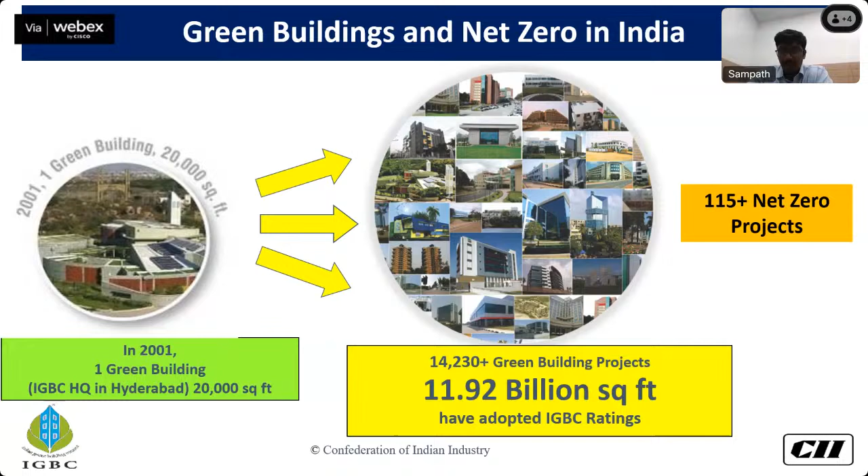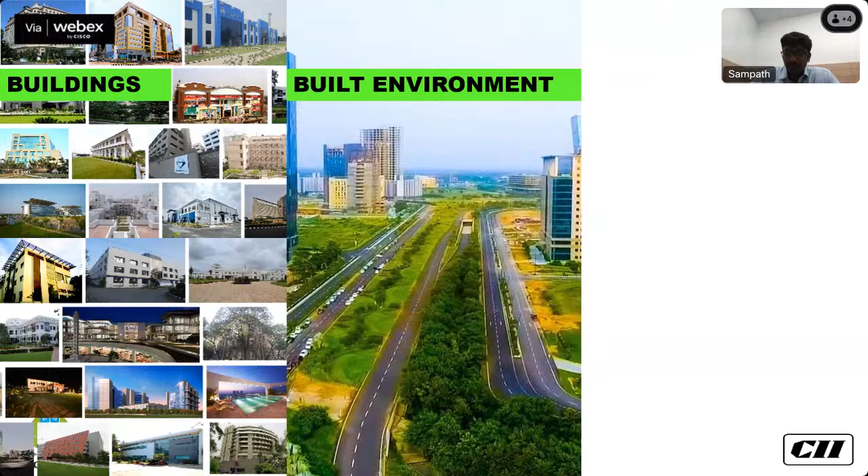We expect many more projects to become net zero in many ways, in terms of energy, water, waste, and carbon. Over the last 2 decades, we have worked on several building typologies, whether in office, residential projects, or airports, convention centers, or factory buildings. Quite a lot of buildings which we have covered, and of course we emphasized on the built environment - townships, large campuses, cities. So with the experience gained from buildings and built environment, we believe that we are well positioned to embark on a journey on net zero.

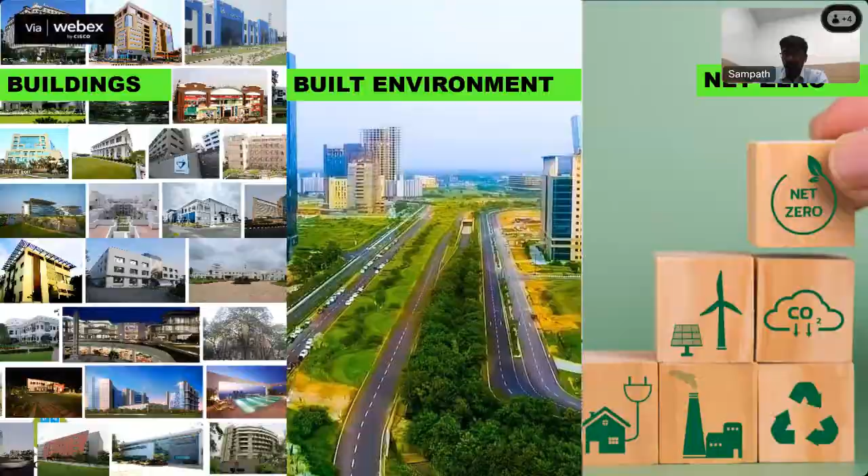Indian Green Building Council is one of the first few councils to start the thought process way back in 2016, when all of us were discussing what is net zero, but how it can be defined. We started our journey, and we launched IGBC's mission on net zero in the year 2021 with a vision to facilitate India to become one of the foremost countries in transforming to net zero by 2050, because we thought we should go on a mission mode. And it's not just the carbon or energy, which quite a few countries or organizations are working on.

We thought it should be a journey in all aspects - energy, water, waste, that is resources, and carbon. Many of the organizations have come forward and committed to achieve the net zero status for the new and existing buildings. And most of our time now, we are spending in terms of facilitating or handholding these projects, how to create their roadmaps to achieve the net zero status.

What is more important is we work with World Green Building Council and many of the councils across the world. Being one of the founding members of World Green Building Council, we are fully aligned with the vision of WGBC, which is whole life carbon vision by 2050, where all the buildings, both existing and new, will be net zero carbon, both in terms of embodied carbon and operational carbon.

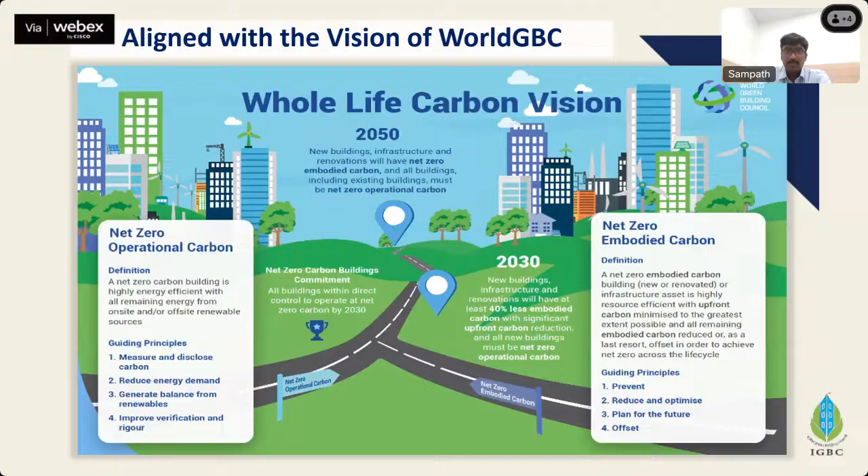Having said this, we have worked on the net zero rating systems exclusively, wherein we are trying to define the criteria for each of these categories - energy, water, waste, and carbon - so that the projects can explore net zero based on the priorities or applicability for the respective projects, and achieve one of these or a combination of these rating systems, and ultimately work towards net zero carbon.

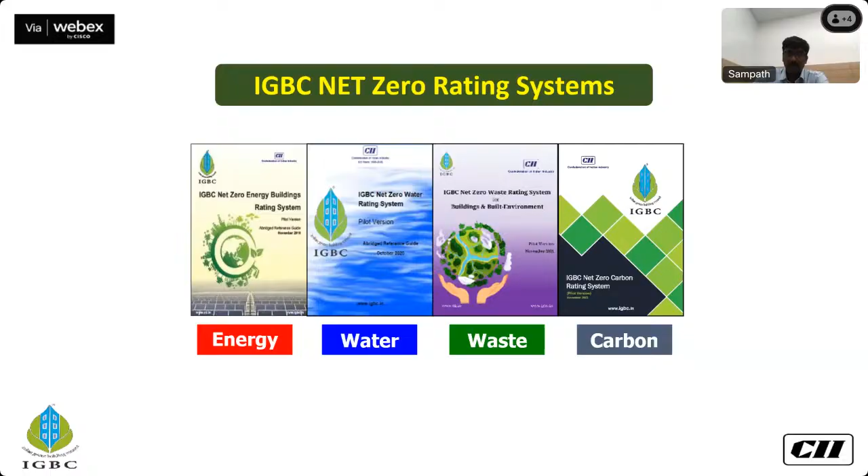What we also believe is there's a nexus between energy, water, and waste, which ultimately results in a net zero carbon status. So we are fully committed to work with the projects and organizations to transit them to net zero and achieve the net zero carbon status ultimately. So having said this, let me dwell a bit more on net zero carbon.

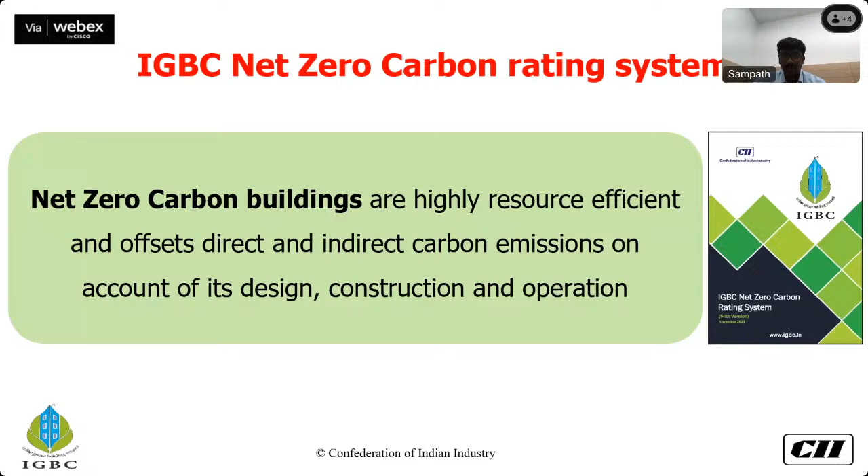So this is the consensus which we have come to with the support of the stakeholders and industry experts. My other panelists, Mr. Selvaraju and Harish Bora, were also on the committee, sharing their views in developing this rating system. I take this opportunity to thank both of them for their valuable inputs before and after the development of this tool.

In terms of approach, we thought we should look at projects both in the design and construction phase and the operation phase, but with a step-by-step approach. So for the design and construction phase, we should emphasize a lot on embodied carbon, and of course a roadmap for operational carbon. Whereas in the operations phase, we look at operational carbon.

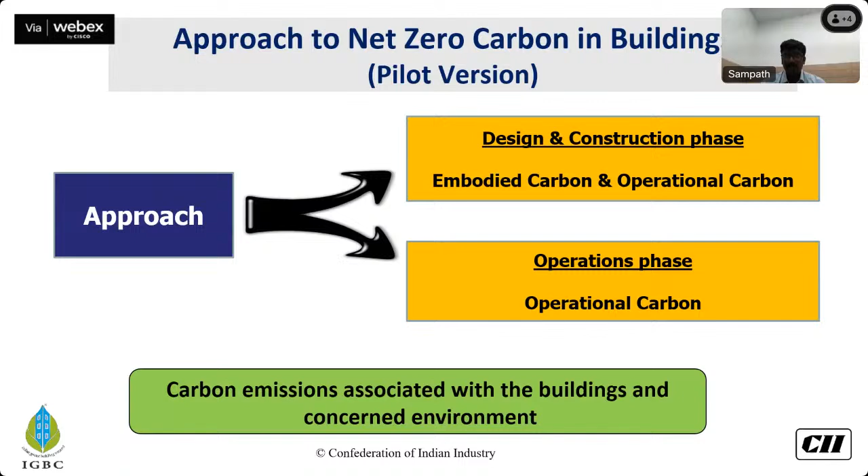Moreover, the net zero carbon is with respect to buildings and the associated carbon emissions with the concerned environment. What we mean is anything related to building operations is what we take into account. So in other words, it is predominantly scope 1 and 2, which we are trying to focus on presently, based on the pilot version approach.

Moving on, we want the projects to look at the whole building life cycle analysis as per the criteria defined in the rating system, wherein we intend the projects to perform whole building life cycle analysis to estimate carbon emissions as per ISO standard 14040 and EN 15978 standard, which is known in the market and which defines the project stages.

So we are looking at both embodied carbon and operational carbon for the design projects. But we are not trying to cover all stages. We thought the market should evolve and understand how to go about embodied carbon with respect to the data sets. So we'll look at embodied carbon in LCA stages A1 to A4, and then operational carbon predominantly with B6, including water which is converted into energy. That's what we're looking at in the pilot version.

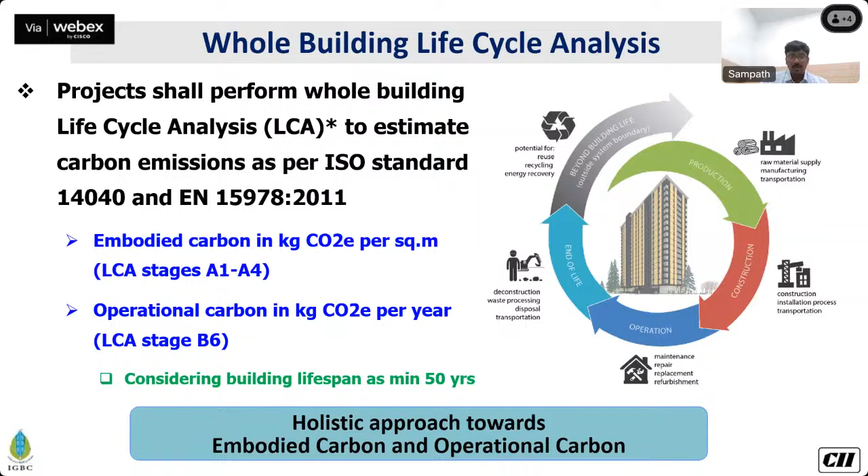More importantly, we thought it's not just about carbon, but as mentioned earlier, there's a nexus between energy, water, and the resources used. So we thought we'll have an integrated approach to net zero carbon. As part of the mandatory criteria, we're emphasizing energy performance ratio, water performance ratio, and how the project is managing waste with respect to organic and dry waste, and whether the project has a green procurement policy so that materials being sourced are sourced sustainably.

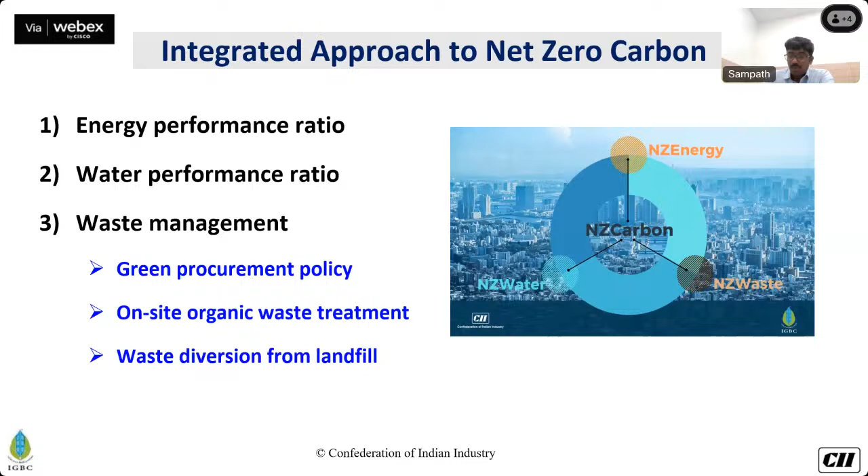Let me delve very quickly into this. As many of you may be aware, the energy performance index ratio is defined in energy codes, whether it is ECBC or ASHRAE 90.1. EPI ratio is nothing but the EPI of a proposed building vis-a-vis a standard building, where we look at a prescriptive approach or a whole building simulation approach. Whether it's prescriptive or whole building, the EPIs defined as per the standard, or as defined by the BEE, will be taken as a standard building, and whatever the proposed case is, is the EPI the building actually has, or the EPI derived from energy simulation.

This EPI ratio should be lower than 1. If it is higher than 1, that means the building is inefficient, and the mandatory requirement is EPI should be 0.95 or lower. Only such projects would be accepted for net zero carbon. The intent here is that projects may offset all the carbon through renewable energy sources, but we are also looking at energy efficiency, energy performance, and energy demand, which should also be taken into consideration.

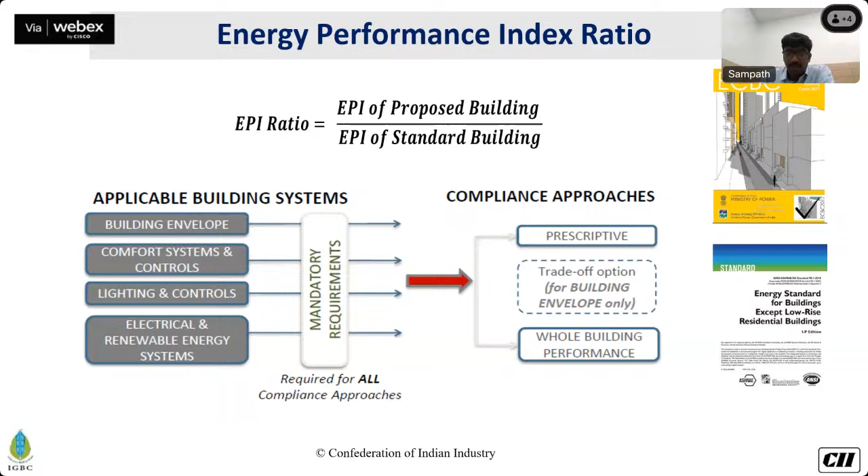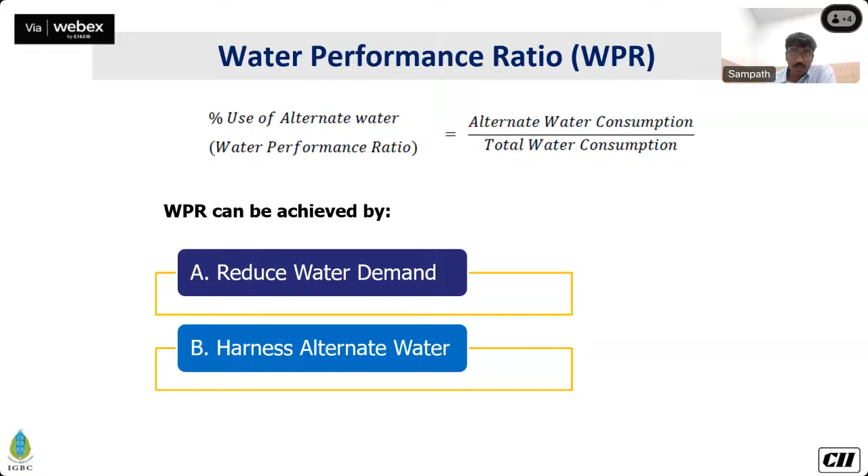Similarly, we are looking at a water performance ratio. The water performance ratio is defined as alternate water consumption toward the total water consumption. Alternate water is any water which is treated wastewater, stored rainwater, condensate water, or even water sourced through tankers or piped connection as grey water. What we are trying to say is the project is recycling water and using as much water as possible within the premises. So we're looking at circularity as a concept here, and how we can achieve it by reducing water demand and harnessing alternate water.

For green procurement in design-based projects, we emphasize mostly construction-related materials. We're encouraging projects to use eco-label products, salvage products, rapidly renewable products, materials with high recycled content, or alternative products like M-sand, and upcycling in terms of the use of construction waste.

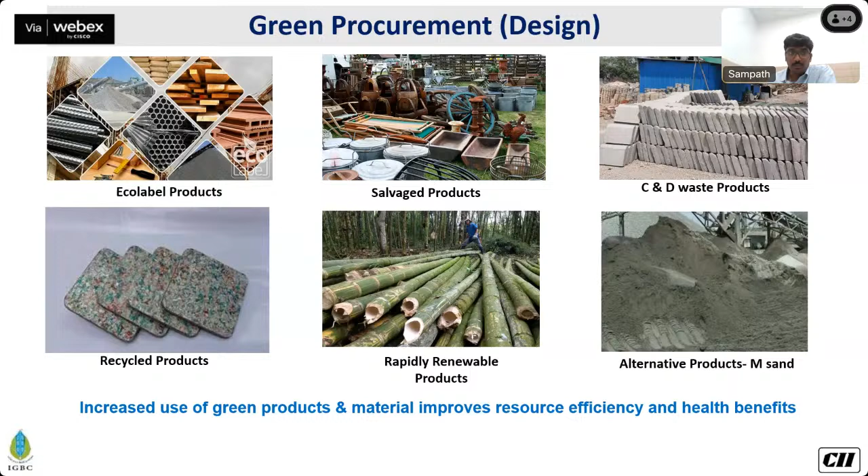Materials made of construction and demolition waste are what we're trying to emphasize through green procurement in design. Whereas in operations, we're looking at biodegradable materials, like trash bins or eco-friendly housekeeping chemicals, use of recycled papers, and banning single-use plastic. So the policies can be looked at from the organization so that the materials sourced for operations are environmentally friendly.

With respect to projects, in terms of the design and construction phase for net zero carbon, as mentioned earlier, we are focusing on embodied carbon. With the consensus and industry practices both globally and in India, we thought we should benchmark, because we can't make embodied carbon zero considering the present context. So we are trying to encourage projects to use low embodied carbon materials.

Here we are looking at civil materials to start with, because these have higher embodied carbon. To name a few: concrete, steel, glass, aluminium. Civil materials and interior materials together account for 80% of the embodied carbon, predominantly from civil materials. We've also set aside MEP products, technologies, or solutions for now. So the emphasis is more on civil materials, as the data set for these materials is more readily available.

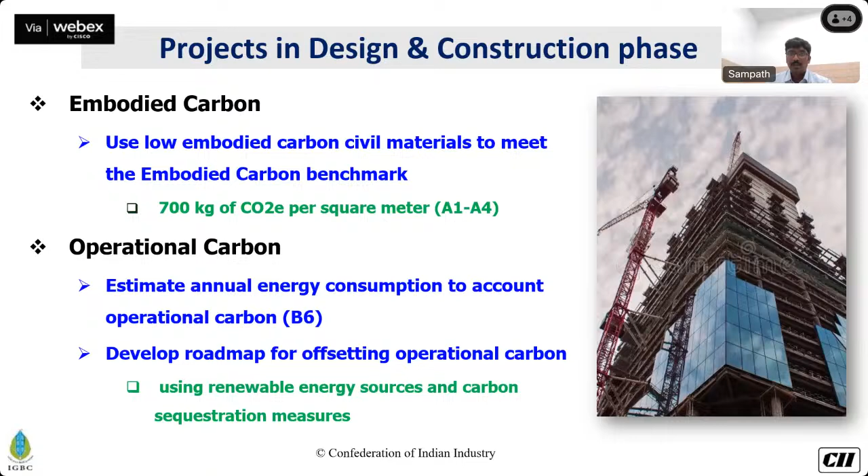For example, a project which uses single glazed glass for the envelope may have lower embodied carbon, but during operations, due to radiation, more heat gain occurs, and cooling loads increase because of the single glaze being an inefficient glass. But if we convert the single glaze glass to double glazed glass, the embodied carbon would certainly be higher, but what could be the relative reduction in operational carbon? So the point we are trying to emphasize is that projects should focus on both embodied carbon and operational carbon while identifying materials and choosing products accordingly.

Some of the strategies to reduce embodied carbon—the first and foremost is how we can optimize the structural design.

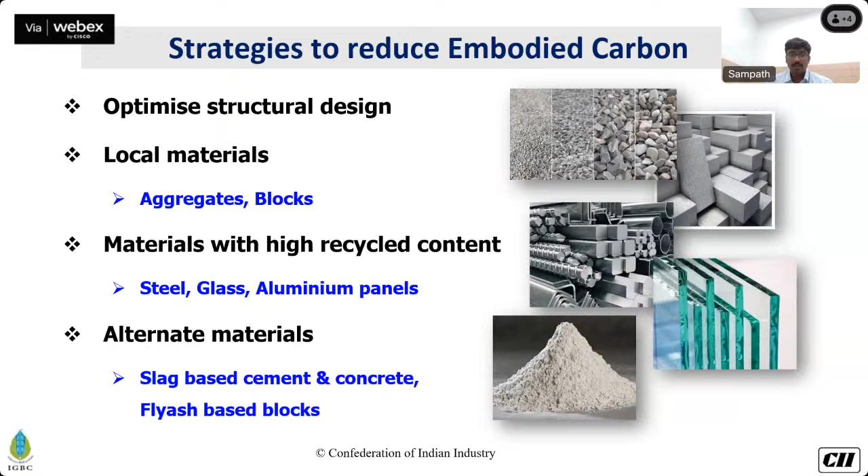This would significantly reduce the use of resources, particularly concrete and steel, which can reduce the overall loads in the building. Sourcing local materials can significantly reduce carbon emissions resulting from transportation. Having sourced high recycled content or recyclable materials also helps reduce embodied carbon. Alternate materials like slag cement or fly ash based blocks can be used to reduce embodied carbon, because we are not using virgin materials which increase the overall embodied carbon.

So we have come up with a checklist. I will not dwell in detail, this was basically to give an overview. We have come up with a checklist wherein projects have to do a whole building life cycle analysis in design and construction phase, emphasis on green procurement, and have strategies to reduce embodied carbon with the integrated approach as we just discussed.

On a scale of 100, the project needs to demonstrate compliance. We have come up with near net zero and net zero recognitions for design, wherein projects have to comply with the benchmark of embodied carbon of 700 kgs or lower per square meter, and then offset at least 75% of annual operational carbon as a roadmap, and comply with a minimum of 40 points. Such project will be recognized as near net zero.

And for net zero carbon, the criteria would change for operational carbon, wherein more than 90% of annual operational carbon should be offset. Of course, we have given a leeway of 10% here, because all said and done, projects can do everything, but still there are certain challenges to offset operational carbon.

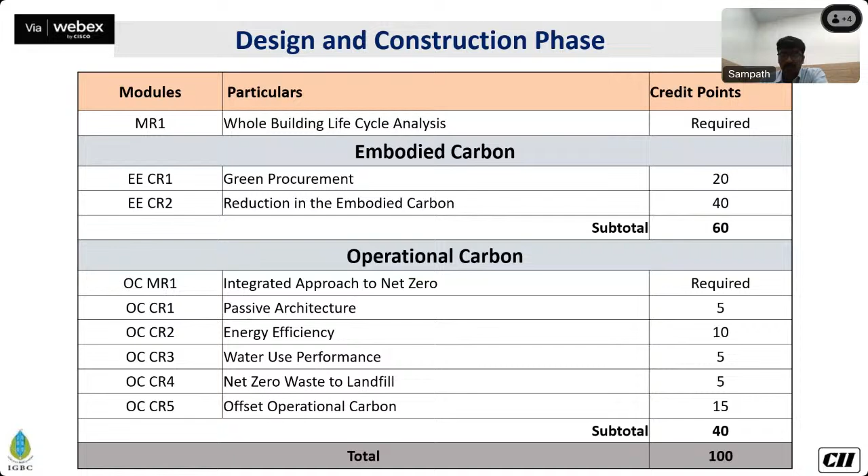Say, for example, by use of DG sets we use diesel, or we use CNG or LPG within the projects, or other sources. Even if you want to source 100% renewable energy, it may not be possible. Of course it truly may not be net zero, but is almost there. Even such projects we are trying to recognize now, and they need to comply with a minimum of 60 points. What we are trying to emphasize is, out of these 60 points, it is very important for projects to emphasize energy, water, and managing resources from materials and waste. Such projects will be recognized under net zero carbon.

Moving on to projects in the operation phase, what we thought is the projects are already in operations. There's a legacy carbon or residual carbon and embodied carbon - that's past. But what we want the projects to focus on is the present and the future. So in that context, we are looking at operational carbon.

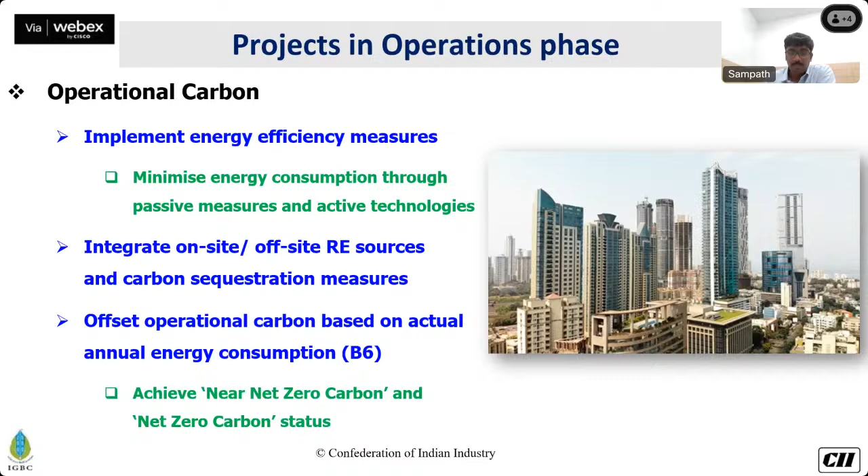So the strategies here would be how the project can implement energy efficiency measures so as to reduce the overall energy demand and energy consumption in the project, and integrate on-site and off-site renewable sources to reduce overall energy consumption, or source clean power, which in turn will reduce or offset the operational carbon, which is B6 as per the LCA stages. Such projects can be recognized under near net zero carbon and net zero carbon.

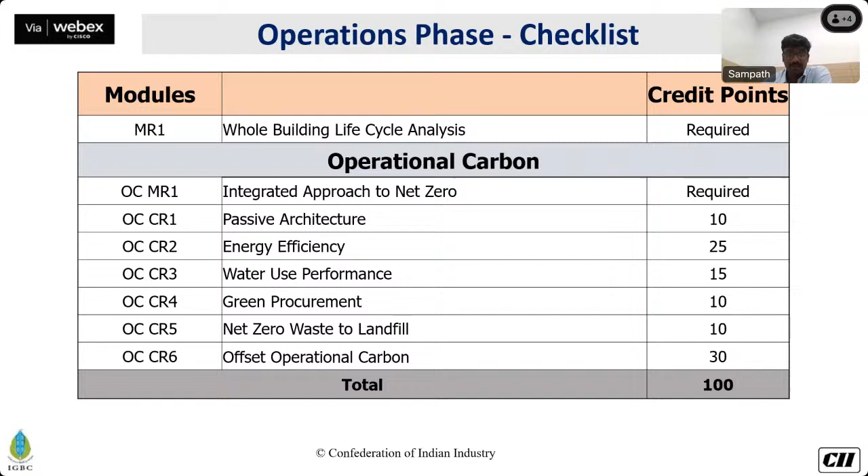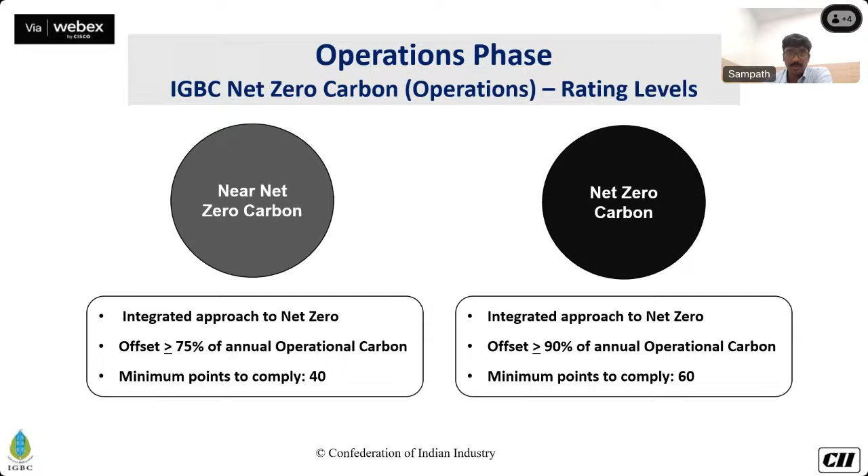So we have a checklist again on a scale of 100, where even in operation phase we're encouraging projects to have passive measures which can significantly reduce operational carbon. Similar to design phase, we have in operations phase near net zero and net zero, wherein the thresholds will remain the same, but we are not addressing embodied carbon. That's the difference in operations phase.

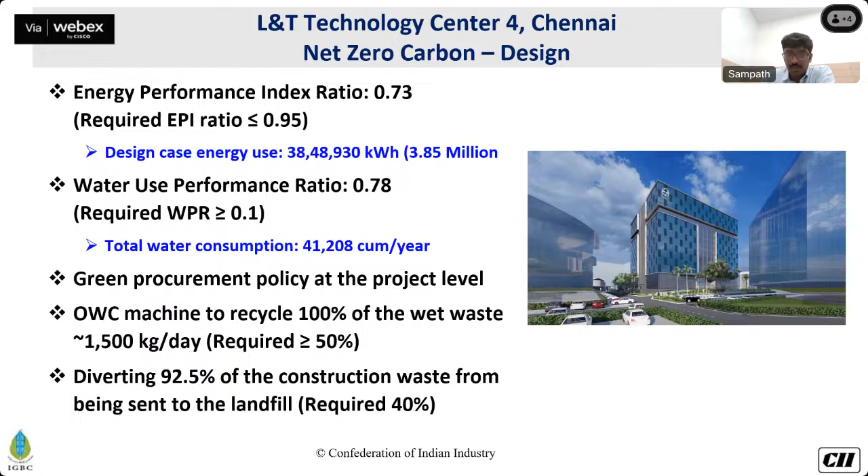So we have a case study here. I just want to inform Mr. Silverus, who will dwell more on this, but we were fortunate to have L&T Technology Center in Chennai come on board as the first pilot project, and very recently we have recognized them under a net zero carbon design phase. Many good measures have been taken by the project to comply with this criteria.

So I just want to share this information, and then I'll take a moment to emphasize that being a pilot, and carbon being a very complex subject, there is a lot more to be done. So we thought we'll take a step-by-step approach. We're not trying to consider carbon in all aspects. There are certain things which were left out, but we are aware of that, and these would be taken into account as we progress, in terms of the availability of materials or market adaptability with respect to adopting these concepts.

So to name a few, in the design and construction phase, we are not looking at interior and finishing materials as well as equipment systems, and also the emissions on account of use of DG sets, electricity or water during construction, or movement of people. More importantly, we are not recognizing carbon credits or RECs. We want the projects to directly reduce embodied carbon and operational carbon.

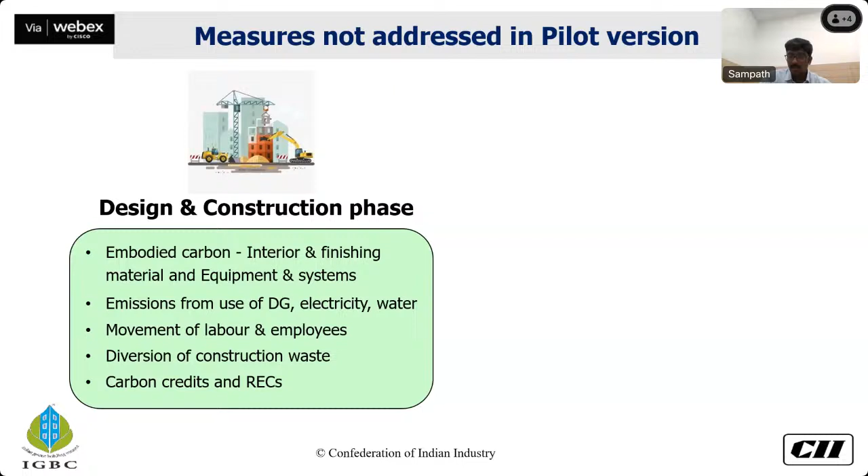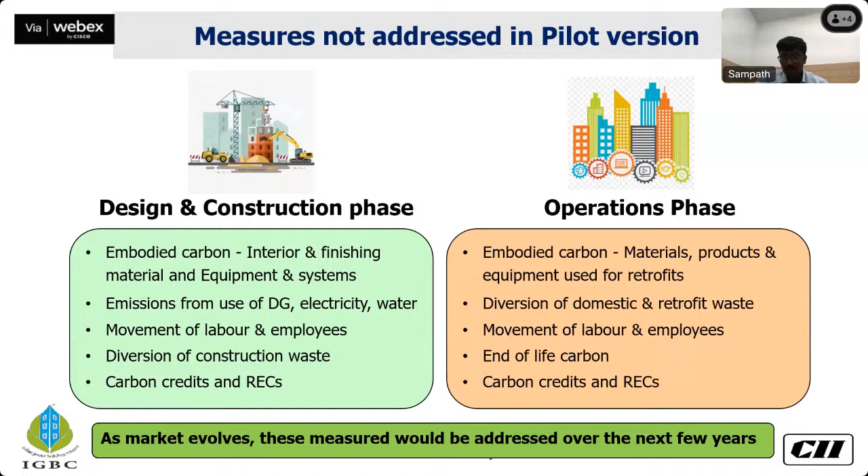The same holds good with operation phase. We have taken certain measures that we will not consider presently, to have a step-by-step approach. But projects which take up these measures would be duly recognized in the innovation category. That's the approach we are looking at.

This is not just for net zero carbon. Over time, as I mentioned earlier, more than 100 projects have taken up pilots in different categories. So what we're telling projects is take a step-by-step approach, whatever is more feasible or applicable. For certain projects, water is more important or practical to implement, so we suggest those projects look at net zero water. For others, energy is more relevant, particularly with respect to local renewable energy policies. Wherever feasible, we encourage projects to adopt energy, water and waste-to-landfill rating systems, and then ultimately look at carbon.

To sum up, ladies and gentlemen, there's an excellent opportunity to demonstrate leadership in net zero. We're looking at leaders who can benchmark the processes. We say green buildings reduce operational cost, but let me share that net zero buildings definitely can reduce operational costs, and going net zero makes business sense, all the more so. More importantly, we are all contributing to India's commitment to become net zero by 2070. With this, I conclude my presentation. Thank you.

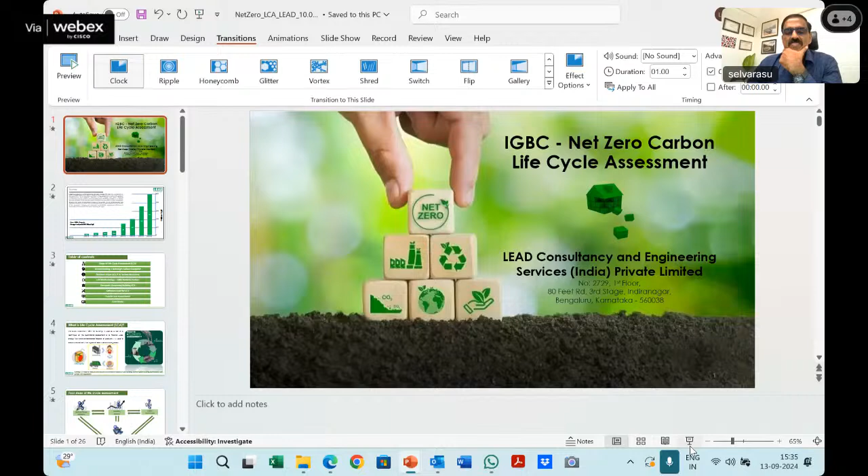I hope my slide is visible. Yes Selva, thank you.

Thank you so much, and thanks to IGBC for inviting me. Some of the slides were already covered by Sambat, so my job is a little simpler. If I exceed my time, please remind me, Sambat. Okay sure, sir. My talk will be predominantly on net zero carbon buildings.

I'll be covering predominantly the L&T case study, which is the first net zero carbon building by design in the country. So just before that, one second.

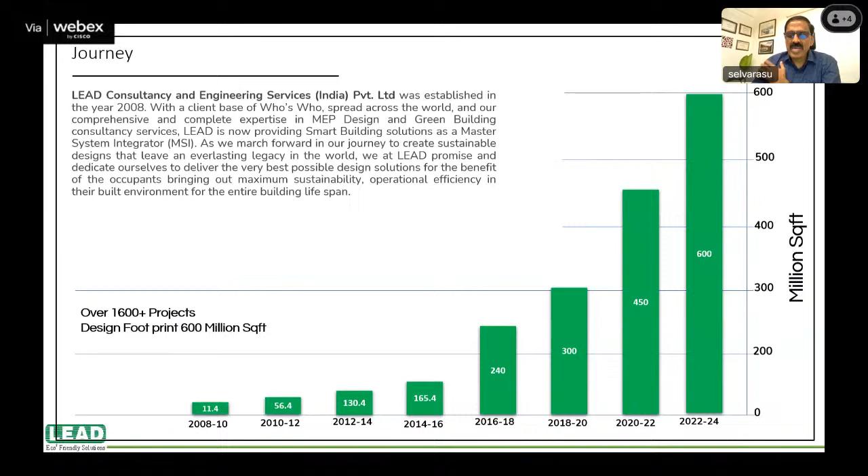I'm from Lead Consultancy. We started 16 years back, and we have done more than 1,600 buildings which are certified in the country and almost 7-8 countries, close to 600 million, that is our footprint in terms of work, with around 180 people working in the organization across various locations. That's a simple introduction about the company.

I'll be talking a little bit about LCA. I think another expert will already be talking about LCA, so I will not go too much into it. A little bit on understanding building carbon footprint, the boundaries, and the scope for LCA analysis. What is the methodology IGBC adopts to perform LCA? That's also something I'll cover briefly since someone already spoke on it. And the standards governing building LCA, software used for LCA, and the case study of L&T. So that's in a nutshell what I'm going to cover in the next 15-20 minutes.

Now, most of you are aware, life cycle assessment is basically understanding the 50 years life cycle of the building.

I make a quantitative analysis to understand the impact the building is going to create on the environment in terms of CO2 reduction, then operational performance, water, energy, waste, all the resources consumed by the building, including embodied energy and carbon, and how we minimize the impact on the environment for the entire life of the building.

We normally classify the building with about 50 years life cycle. It starts from a simple cradle to grave: extraction, manufacturing, use case, then maintaining it for 50 years, and disposal after demolishing the building or part of it. The entire life cycle needs to be analyzed to understand how the building will impact the environment, from extraction, construction, operation and maintenance, to disposal.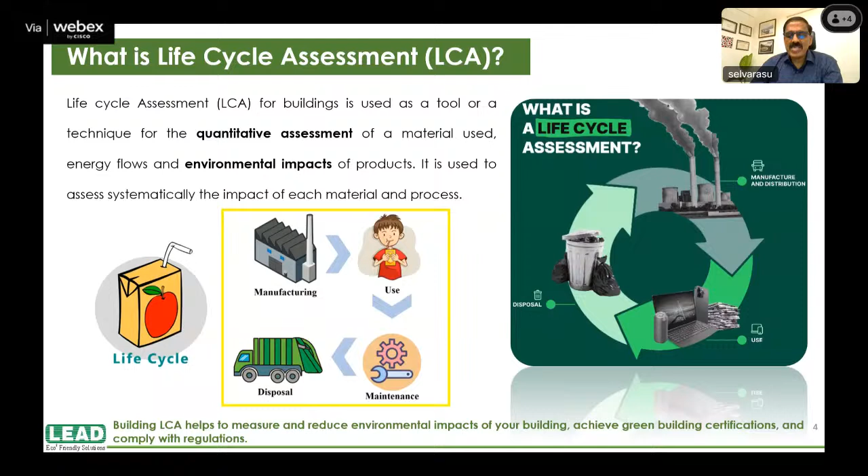When you look at the life cycle assessment, it gets into 4 critical steps. One is goal setting and scope definition. We need to define the goal, what you want to achieve in a building, and the scope needs to be defined very clearly at the beginning. Most of you are aware how scope 3 emission is very tough right now in the country to really perform the task.

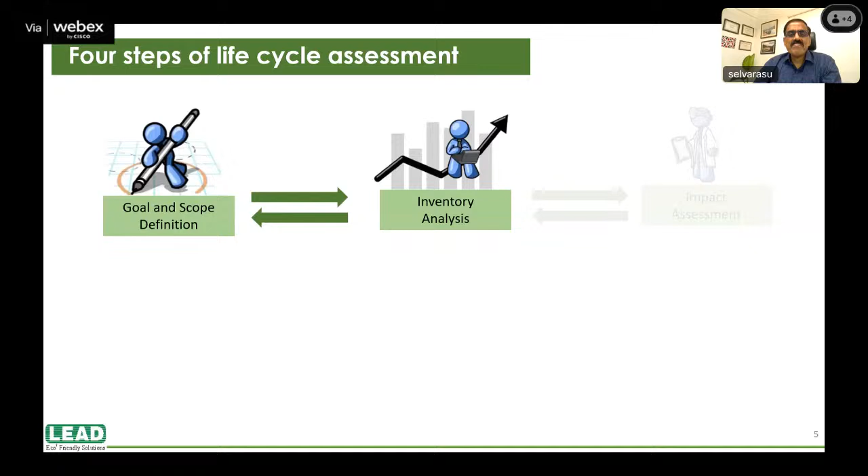So we need to have a very clear scope definition, which IGBC has already performed. Then inventory analysis, where we take stock of all the building material, systems and construction we are going to do in the building. Then impact assessment through LCA. Then we revisit the goal and scope and keep refining the entire process. This goes in multiple cycles to get the best result, minimizing embodied carbon emission or operational carbon emission.

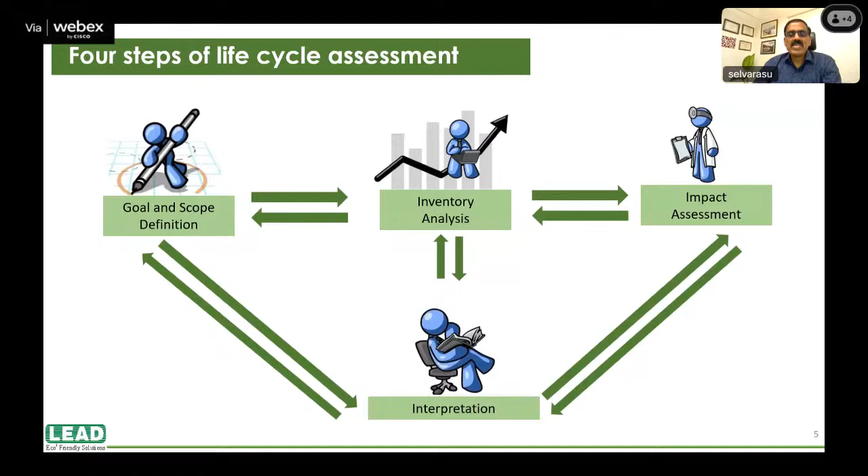When you look at carbon footprint, it starts from manufacturing emission, extracting raw material from different sources, then manufacturing of product for your building construction, then transportation from manufacturing to distribution to the building site. Then there's a lot of emission during construction since we consume water, generate waste, and consume energy. Then operational emission, for 50 years we operate the building.

We also keep renovating it in different periods over the entire 50 year cycle, so there's a huge amount of carbon emission possible in that life cycle. Then end of life, it has to be demolished and disposed of - something can be recycled, something goes to landfill. So it's very critical to plan from the beginning to minimize landfill at end of life or during construction. That kind of material needs to be selected for the building to have minimum impact on the environment.

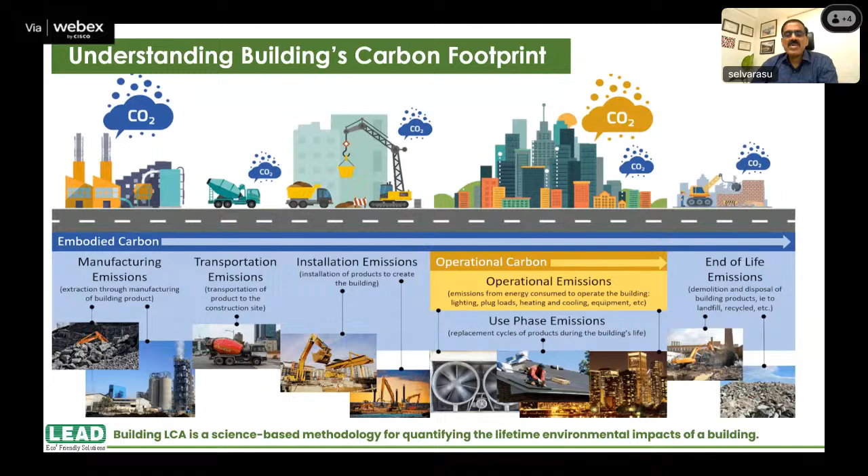This is how the whole cycle goes in terms of cradle to cradle, to understand the carbon footprint. So we need to focus on all elements - it's not just design or embodied carbon or operational carbon, we need to consider the entire cycle. It'll take some time; globally people are trying to get this entire thing stitched together with scientific data done once in the industry.

And various system boundaries, you know very well, this gets classified into A1 to A3, meaning raw material extraction, transportation, manufacturing. That comes in the manufacturing segment, up to the factory gate. Then construction - again transportation, installation at site.

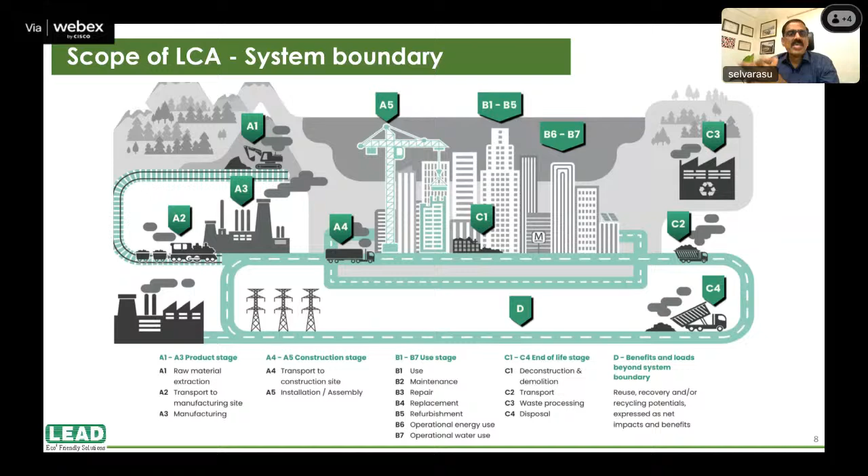Then B1 to B7 is basically building use, maintenance, repair, replacement, refurbishment - the entire operational performance is clubbed into B1 to B7. C1 to C4 is end of life stage, like demolition, transportation, waste disposal, all this stuff. The last, D, talks about how you recover, reuse and recycle once the building is demolished. So this is how the classification has been done for LCA analysis.

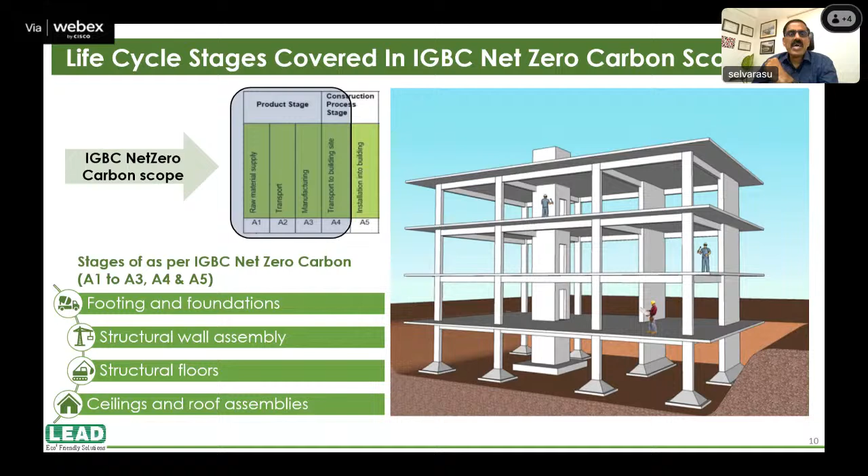And already our Sambat explained about embodied carbon and operational carbon, what is the limit, how the number game will be on the IGBC rating point of view - I will not dwell upon this part. But when we talk about life cycle coverage of IGBC, we are talking about raw material supply, transportation, manufacturing, and building site, how we are constructing it. So that's how the overall A1 to A5 is covered in the current rating program, starting from footing and foundation, structural floor, ceiling and roof assembly - the entire system is covered under this category. This is how it has been taken care of in the LCA analysis and net zero carbon scope.

I think the LCA process is as simple as other activities. Pick up the design and BOQ, extract the data required for different components like substructure, superstructure, pick up that material and analyze it, put it in the software, and see how we can optimize it by selecting different kinds of material.

If the current material is not really yielding benefit, then get into a lot of work on carbon reduction measures. I'll show you a case study of how it has been done, analyzing the proposed case, how we differ from or improve from the IGBC standard of 700, and then get into further reduction.

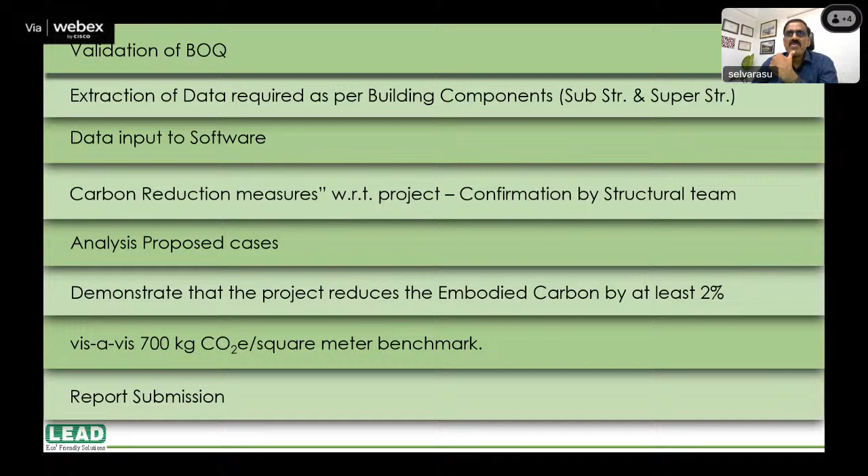700 is the upper limit. Above that you will not be called carbon neutral. There are various other reduction strategies required, up to 40%.

Then the report submission, this is how the overall process goes. In the BOQ, I don't want to dwell too much, but it talks about concrete use, shear wall and substructure, superstructure, retaining wall, steel used in substructure and superstructure, plaster type, waterproofing, facade glass - a major item in a typical core and shell building - glass, mortar use, cladding system, exterior wall, and various other material used for substructure and superstructure. All these elements need to be covered in the entire quantification to perform the task.

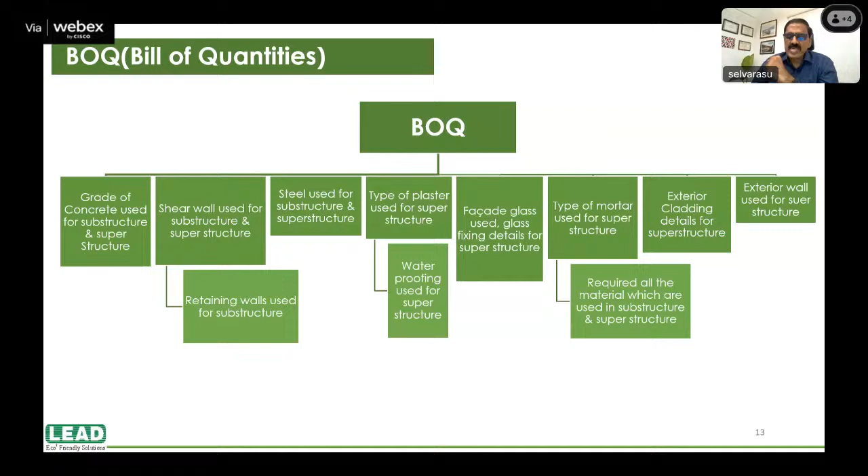I'll just quickly run through the L&T case study. This is the first building to take up all kinds of net zero activities, right from the design stage, to really innovate when we perform the task. This is in Manapakkam, Chennai, the L&T campus. This building is about 59,000 square meter built-up area, G+13 structure, for their own use.

This building is going for IGBC new building and health and well-being certification. It is the only building where we have all the programs applied. In fact, we proposed it and there was no resistance from L&T that this cannot be taken up, so we tried IGBC new building and health and well-being.

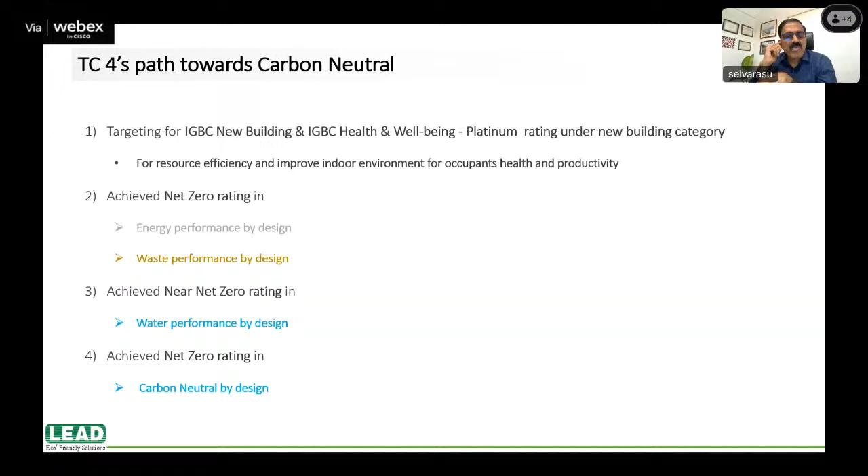Which is now in the final stage. This project achieved net zero energy, net zero water, and net zero waste by design, and also net zero carbon a few months back. I won't go deep into net zero energy, water, or waste - I'll focus a little bit on carbon.

This building has all the best efficiency measures: chiller, lighting, glass, roof, insulation, wall, and EPI ratio is 0.73 - meaning 27% better performing than ECBC code. Window to wall ratio is about 60%, with 250 kilowatt solar panel installed, the maximum possible with available space, and the rest procured as offsite green power. That's how net zero energy by design was achieved.

Net zero waste, again, same way. A lot of effort has gone into the building material and sourcing material in terms of made-to-order. Then the waste is properly segregated and taken for recycling and reuse, and sent to manufacturing sites for manufacturing product.

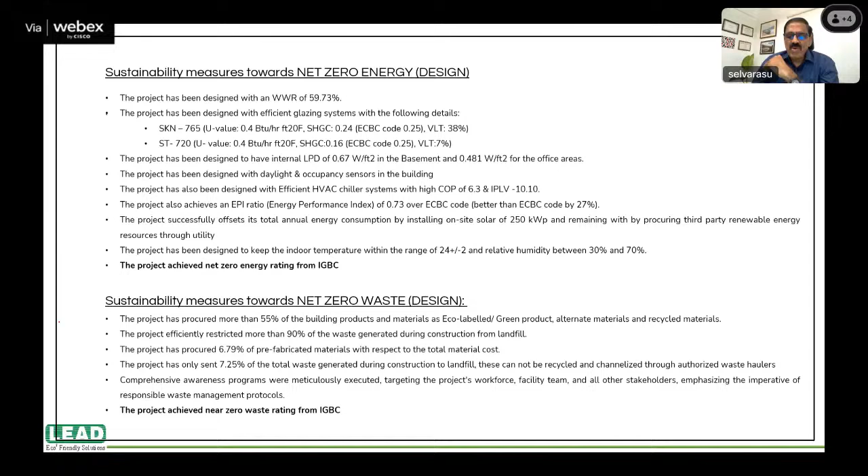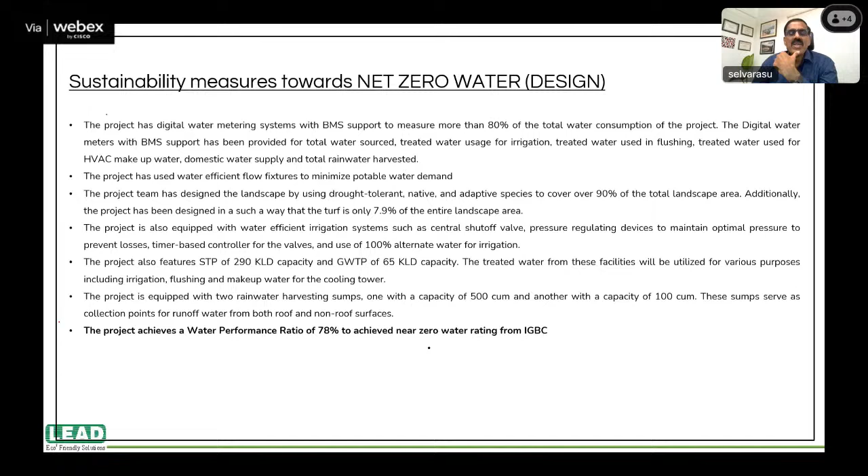On water, same thing - huge activity has been done to increase infiltration, efficient fixtures, and treated wastewater usage, etc. It performed extremely well to get near net zero water by design.

Now coming to embodied carbon - once we performed our LCA analysis, we did a lot of work, but there were some changes in terms of material composition. They agreed to perform it, and once we did, we could change the material composition.

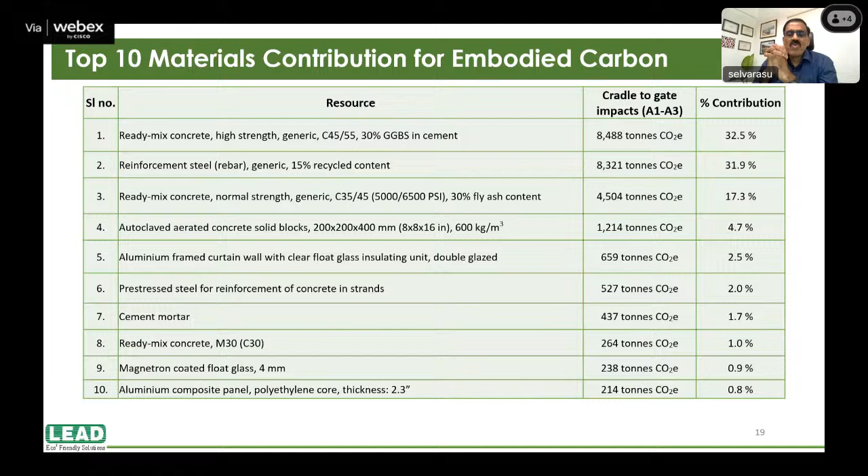So if you look here, ready mix concrete really used GGBS cement - it contributed 8,488 tons of CO2 reduction from normal ready mix concrete. Then reinforcement steel, ready mix concrete, fly ash about 30%, AAC block, aluminum frame, curtain wall, pre-stressed steel for reinforced concrete, cement mortar, ready mix concrete - you can see the numbers, how much each contributed to the overall reduction in CO2 equivalent per year.

This is what finally has been achieved - around 28.71% reduction in embodied carbon from 700. This project achieved 499 kg of CO2 equivalent per square meter.

And again, looking at operational carbon, it's critical to have a projection of how we are going to manage this. As I said, 250 kilowatt is on-site, and the rest of the power will be procured off-site - they already have an agreement with the local electricity board.

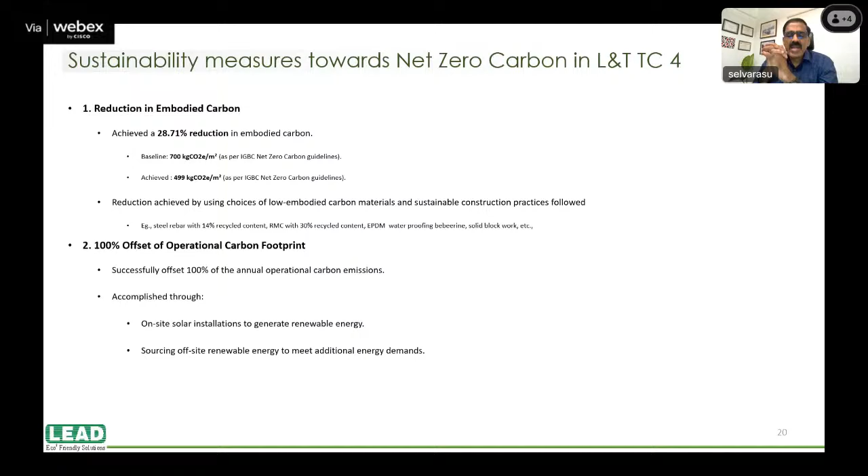What will happen if the material is procured not from Chennai but from Delhi? So we did a lot of iteration for our own understanding. Whatever we transport across the country doesn't have a major impact if the distance limit is not too large, about 4,500 kilometers.

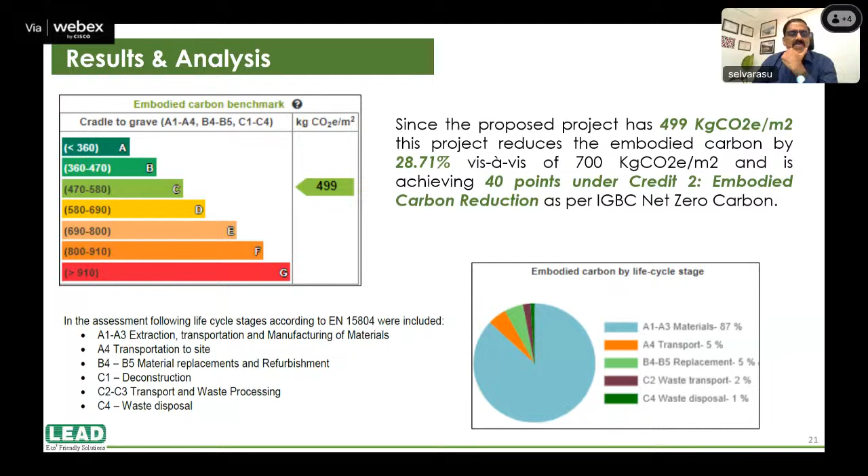Transportation 5%, replacement 5%, waste about 2%, waste disposal 1%. That's how the overall composition worked out here in this building, if you talk about A to C4.

And this is the kind of distribution of the checklist. You can look at it: LCA analysis, green procurement, embodied carbon 40 out of 40, and operation side about 28, totaling about 78, and net zero carbon requirement is 60. This project achieves 78, exceeding the requirement of IGBC to get the net zero carbon.

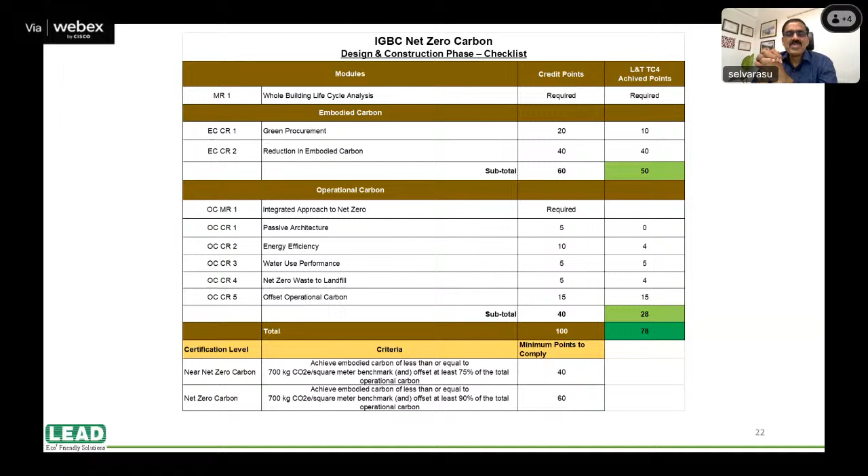So they were given a free hand, L&T, that whatever is best possible, let us do it. Don't limit yourself to the number IGBC has specified. And these are some of the elements.

If you look at the substructure elements, like diaphragm wall, M10 and M30, solid concrete block, AAC, anti-termite chemical - these are some of the materials contributed. Rebar steel about 40%, with 14% recycled content.

And this, whatever I've already spoken about, has been compiled here in terms of material composition to get this result. These are the elements that really contributed to material embodied carbon reduction.

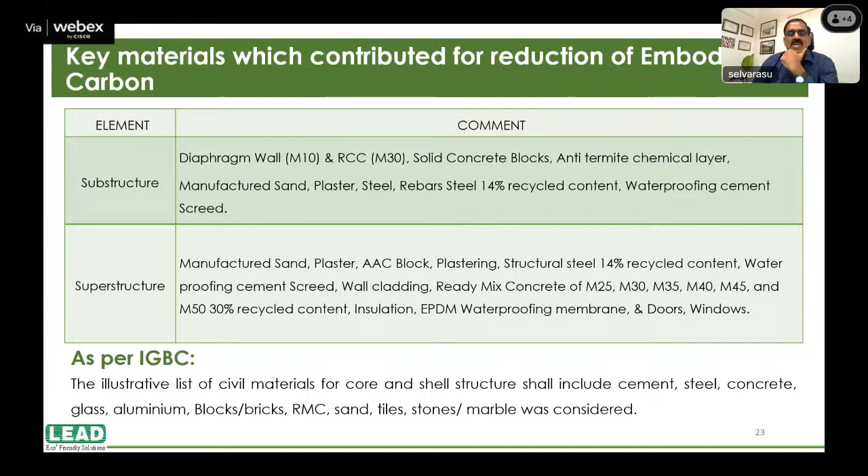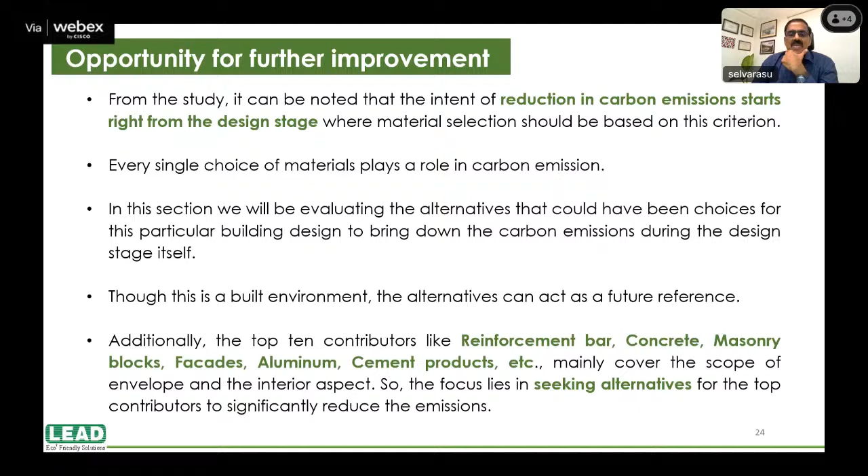And further, we analyzed it - okay, let us not limit ourselves to achieving the embodied carbon target, is there any way to further reduce it? Due to techno-commercial reasons, we did not proceed further on the implementation.

Yeah, these are some of the areas: further use of AAC block in other locations, gypsum lime plaster over cement plaster - that gives a better reduction.

And M30 with recycled content of 30% would have given a slightly better result. Brickbat coba, nitrile rubber insulation over XPS has been used in the building. And rammed earth with burnt brick masonry gives a good result, as does filler slab and jack arch compared with the conventional slab.

So there is scope. It doesn't mean that once you achieve carbon neutrality, there's no further scope - there is a possibility we can even improve further. So that's it from my side.

Very short and sweet, thank you so much. If there are any questions, I'd love to answer them.

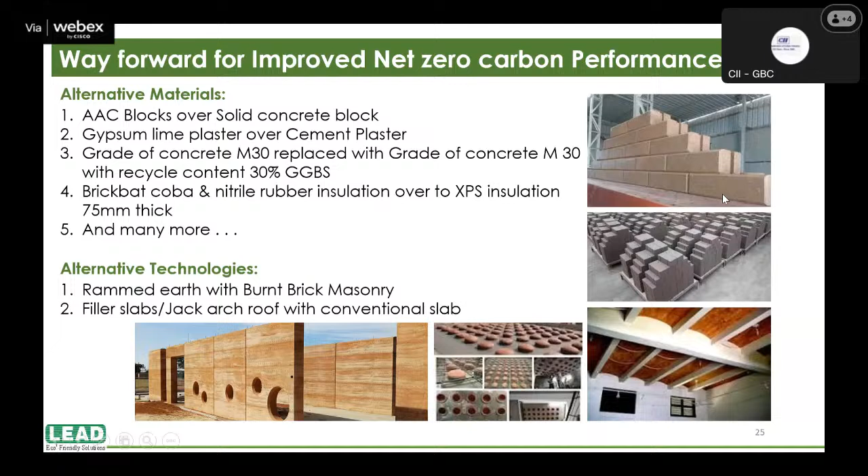Any question? Because I have given my number and email ID, any participant, if you have something, you can write back to me. We'll have to answer - finally, we need to educate and disseminate this for larger adoption in the country. Thank you so much, thank you. Thank you for your patient hearing. Thank you so much, Silva, for having me.